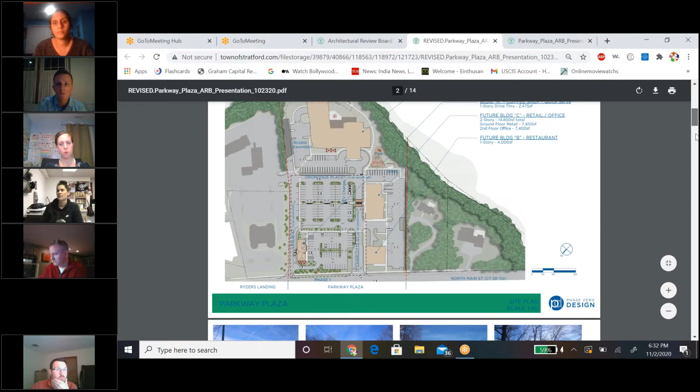They're going to be eventually developed into this CNC district, which we've created as 4 different buildings with allowable uses in the CNC zone. But tonight we're only here for the coffee shop, which is building A in the left-hand corner along Main Street, basically on 6540 Main Street. It's the only building being developed at this stage of the project. Buildings B, C, and D are for future development. They will be CNC uses, but because they're for different stages or phases of the development, they're not going to be discussed and are not under consideration here tonight.

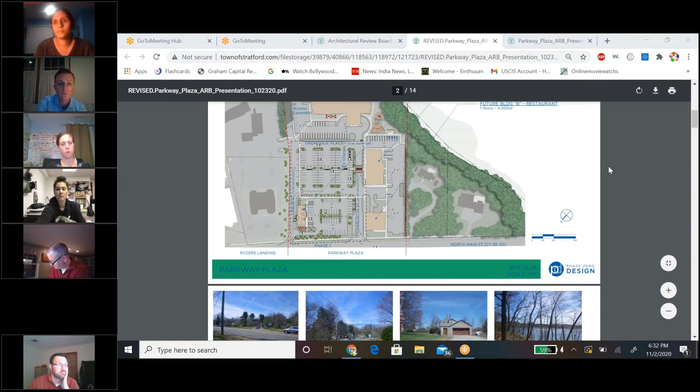So we've submitted everything for you guys to consider for building A, the coffee shop. It's going to be a 2,475 square foot drive-through sit-down establishment. Again, it's an allowable use in the CNC zone. It's going to fit all the CNC requirements and meet all the special case criteria. We'll present all that when we go to zoning for our special case and site plan application process.

The building dimensions are approximately 80 foot long by 28 foot wide. It's going to be 1 story, approximately 25.5 feet tall. In designing this building, we've considered the historical New England village character of Stratford. It's going to be compatible with the surroundings and this overall development. We've shown and factored in appropriate open space. Entrances, exits and parking are going to be safe and accessible, and there's also going to be pedestrian access and bike paths.

I'd like to bring in Robin Kiernan, our project architect with the firm Phase Zero Design. She's going to speak about the architectural style and character of the coffee shop, the building materials and colors, the roof and facade, the lighting, and some of the other features at this time.

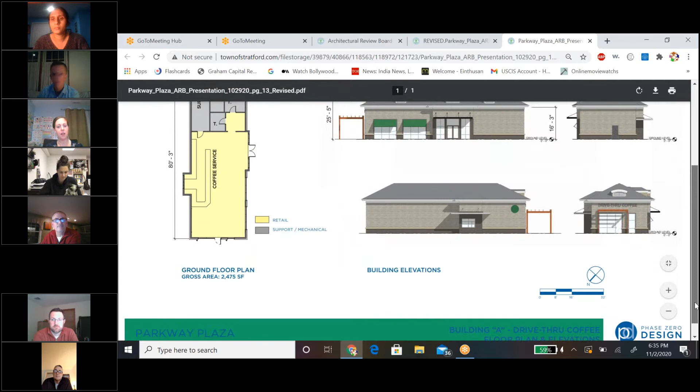Thank you. So I'm Robin Kernan with Phase Zero Design. Before we dive into the drawings of this specific building, some considerations we took for the overall design, as we're only presenting phase one at this point, but we do have a comprehensive design for the entire development. Our original inspiration per Dr. Spriglio's request was that the design be based off of or derived from inspiration from the Merritt Parkway due to the direct vicinity, but also the architectural history and value.

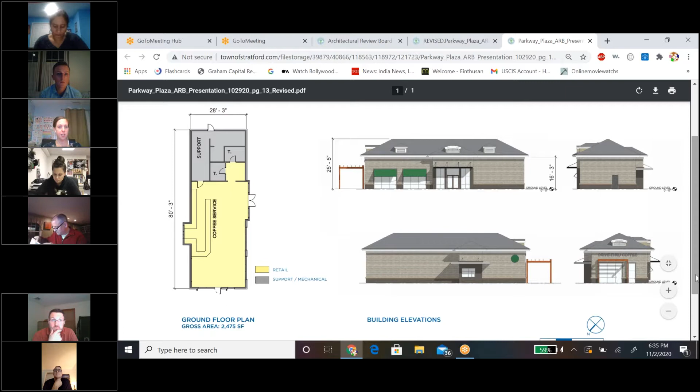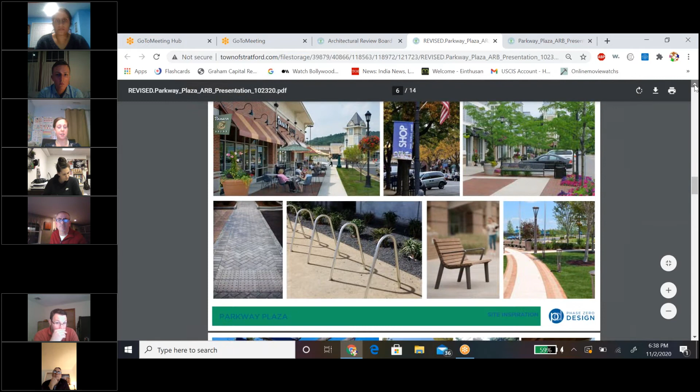You go down one more slide. Yes. This one? Whoops, I think it's one more up. Sorry, I know they're sliding fast. Yes, this one.

So as much as we're emphasizing building materials, we also wanted to have strong emphasis on softscape and hardscape. These were again some precedent images that we looked at with different colors of hardscape, herringbone pattern inlays. And a lot of these materials will be shown when we get into the site-specific design as part of planning and zoning, but things we wanted to take into consideration for the initial design of the building.

We have started to select some of our site elements, which you'll see in a few slides, specifically looking at aluminum benches, trash receptacles, and light fixtures that again are blending that modern and traditional looks.

You go down one more slide.

Something else and some feedback that we had gotten from our preliminary meeting many, many months ago was that we really wanted to incorporate placemaking into the overall design.

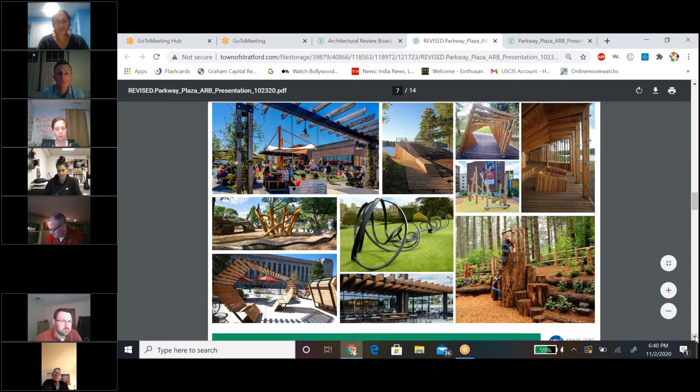Slide down another slide. Okay, I think I went too fast. Yep, that's okay. Halfway there. There you go.

Can go down to the next slide, please.

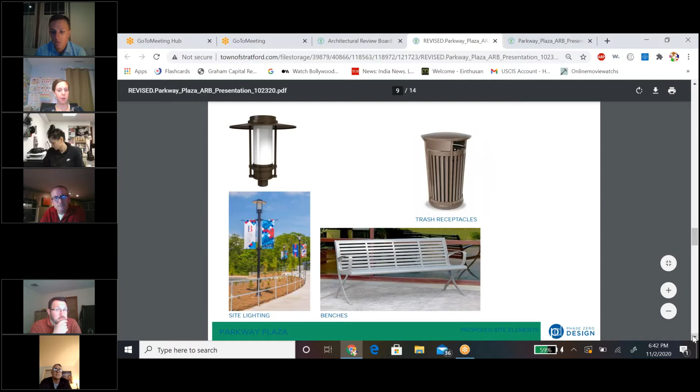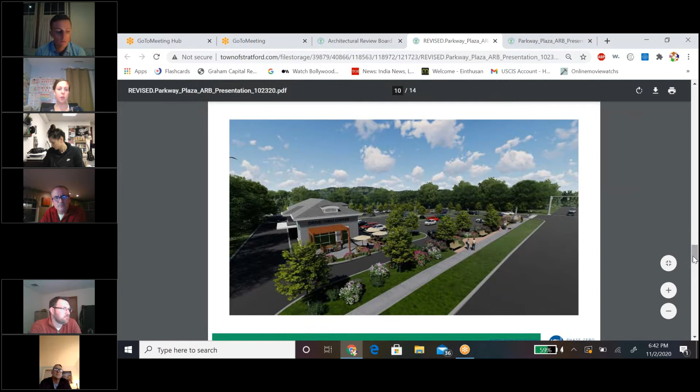We've included some perspectives representing the building, but also the site, of equal importance. You'll see the pedestrian walkway running parallel to Main Street, and you'll see from another view in a few moments where the sidewalk then turns up and runs perpendicular to Main Street for pedestrian access that loops around to the coffee shop. You can start to see that outdoor seating area with the wood-like pergola structure out front of the building. And we've taken into great consideration for site elements, landscaping to create a buffer from Main Street into particularly the parking fields.

Go to the next slide, please.

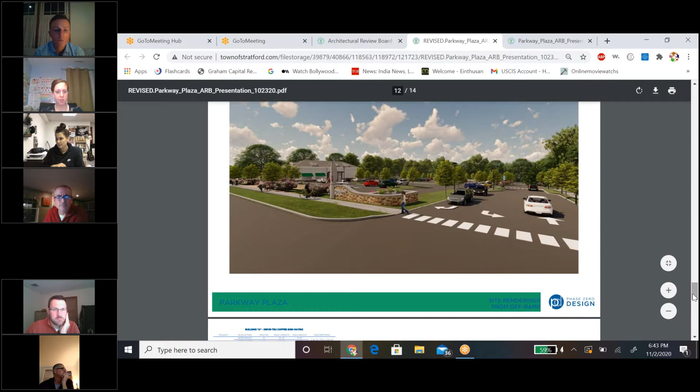This 3D image is from that main entry point, so you can start to see some of the stacked stone elements there for some wayfinding and signage into the development. And then what you don't see on the far right side, you'll have a similar arc of the stacked stone to really highlight that entry point. And you can start to see the sidewalk on the far right side that will help with the pedestrian access.

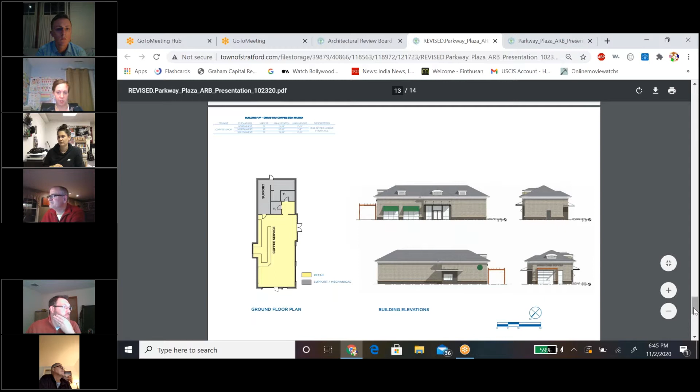And if you go to the last slide, you should see a closer perspective of the building. Thank you. So this is kind of everything I've talked about. You have the black iron metal canopy highlighting the entry point with your awnings to the left of that. We will have some landscaping there before the building footprint itself. Outdoor seating on the far left, which is facing Main Street. The trash collection will be concealed by the building from the street, on the far right side, kind of tucked around the corner.

And that's pretty much where we are.

Shall I turn off the screen share? Is it helpful to leave it on if people have questions, if we want to return to a specific slide? Yeah, I think that's fine.

So Jamie Miller, Chairman, thank you Robin for that presentation. I think what we'd like to do, and I'll point out, I see John Zabel who's here now. I'd like to point out he's recused himself because of prior relationships, but I think it's the civil engineer surveying company, so he will not be participating in this. But I think the best way to do this digitally is to go around the room one by one and ask for board members' comments. I'm just going to go in order here, and I see Steve first.

So Steve, would you like to weigh in on your thoughts? Yeah, Vice Chairman Steve Law here. Thank you, Robin, for putting this presentation together. I have a few comments, not in any specific order. I'll just run through them individually.

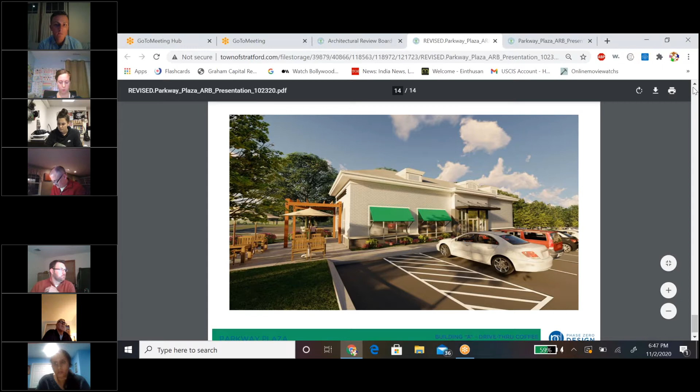The west elevation of the coffee shop is fairly unarticulated, and it's unfortunate since we're trying to create more of a streetscape. I know it's not on Main Street, but if there's any way to articulate that elevation a little more, I think that would help the overall aesthetic of the building. What our guidelines try to do is create more of a sense of place and a streetscape, so that's why I'm wondering if there's a way to put the drive-through on the north end, the short end of the building, towards the inner part of the complex and not on the edges.

A couple other items. I don't see any connection for the bike path—there's a greenway bike path that goes up and across the bridge. Will there be a connection to that bike path?

Just a couple other comments. Yeah, do you want me to respond, or do you want to wait until the end?

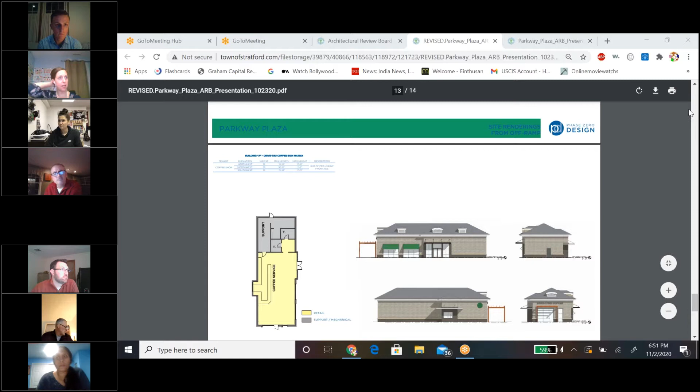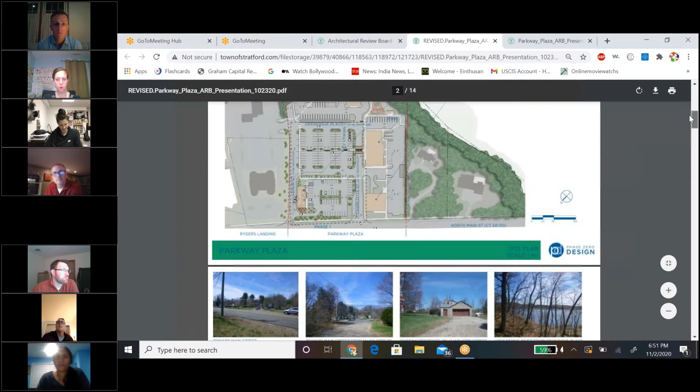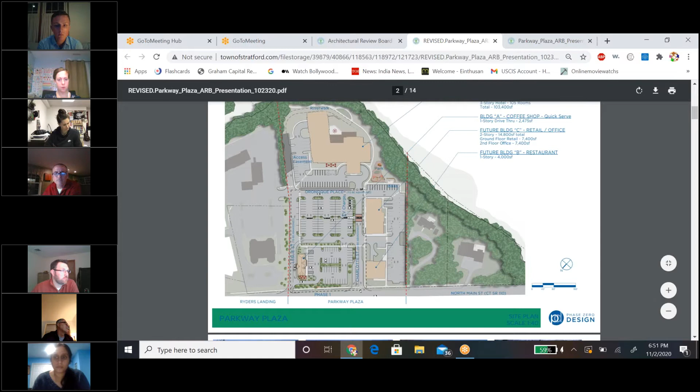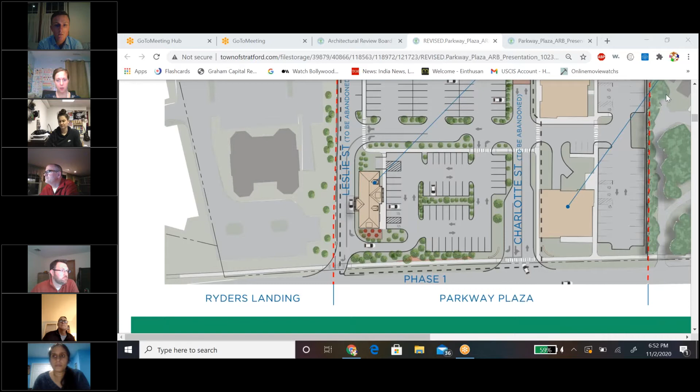Yes, thank you. If you could zoom in just a little, specifically there is a red dashed outline around phase 1. It might help if we can look a little closer. Yeah, trying to do that. So where did you want me to do it? If you just scroll up just a little, we don't necessarily need to see the entire parking field in the middle, but. Is this good? Perfect, thank you.

Yeah, that works. So I agree with your comments, Steve, regarding the elevation on the far left side, which is in this case planned west. I agree we can add some decorative elements there, some more design elements. That is the drive-through side. I can discuss potential relocation with the civil engineers, but we did explore a lot of options. This was the best location in order to allow for queuing, to not back up. We have, I believe, an 11 car queue for this drive-through, which is the tenant's requirement.

One of their other requirements, and I think it works well, is we wanted to have a bypass lane, which is this exit off of Leslie. It is a one-way street from basically the middle of the site, just north of the coffee area with their parking. So it is a one-way exit, so you either can queue into the drive-through for the coffee and then route back through and then exit out through Charlotte, or you can opt to do the bypass lane on the far left, being this is a one-way, and it's a little hard to see here just because we're not scrolled down all the way, but it is a right turn only out of Leslie. So all of that played into the placement of the drive-through, the orientation of the building.

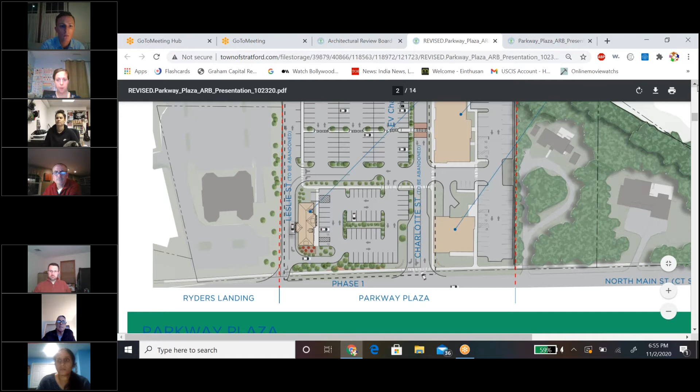As part of a later phase, the pedestrian walkway that runs parallel to Charlotte Street will then connect up to where we have a designated bike rack area with an outdoor community placemaking park, for lack of a better term. So we will have that as part of the overall concept.

Phase 1 doesn't specifically identify bike storage, but it does provide pedestrian access.

Regarding the parking count, yes, for phase 1 it does feel like a lot of parking, because that center parking field is actually going to support all of the later buildings. We included this in phase 1 not because we need it for parking, but due to site drainage and grading that will need to occur to first develop phase 1. We'll go into much further detail for planning and zoning when we submit the grading and drainage drawings, but we needed to develop that parking field in order to create phase 1 for the coffee shop and its adjacent parking. It just happens to fall into it, even though it does feel like a lot of parking initially.

To be honest, we hadn't discussed a bus shelter along Main Street. I think we would be very open to discussing that. I don't think we're opposed to it. I might relay that to Steve Warner to see if he has any comments on it, but that's definitely something we can take into consideration.

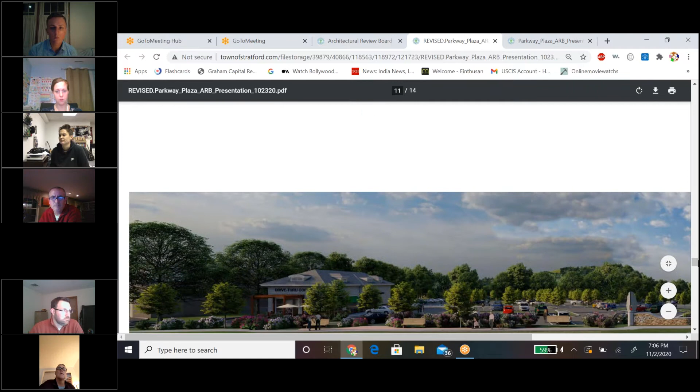Perfect, thank you. So what we are proposing, as we're finalizing the site design plans, we will be updating our perspectives to correspond to specific tree types. Right now these are a bit of placeholders as we finalize the site design. We do propose 4 maple trees running along Main Street as part of phase 1. We'll be conscientious not to block the building signage, as that's crucial for the tenant and the users. We plan to incorporate native shrubs such as hydrangeas with ground cover of white coneflower, juniper, and black-eyed Susan - so some varying height, but only 4 trees.

This perspective will be updated to represent those exact locations. We are going to have this curved detail that juts out past the sidewalk, this undulation, just to enhance the user experience as opposed to just a straight sidewalk, and an opportunity to put some benches there.

So the trees in the front are going to be red maples, but we also, through the rest of the site, will be incorporating, in the parking inlay, honey locust, and then along Charlotte Street, which is perpendicular to Main, black gum trees, and then the main parking field beyond is going to be swamp white oak.

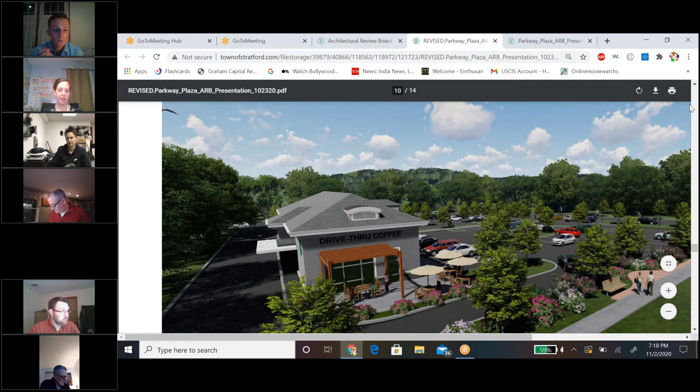Robin Kernan, Phase Zero Design. Yes, on the site plan, page 2, we incorporate a limit of work for Phase 1, shown as a black dash line. It will be the coffee shop with drive-through, the parking directly to the right of that, and the parking field to the plan north of that. Essentially anywhere populated with landscaping and actual trees is that middle rectangle - parking directly adjacent to the coffee shop, and also the parking field directly north of that.

Jamie Millward, Chair. Okay, I see it now, it's not on the package we have, but now I'm seeing the line. So you're going all the way up to what used to be called Oronoque Place, and all that parking is happening at this time. Correct.

Okay, so I understand better. I thought at first it was just the area down in front by the building. So until the rest of this site gets developed, you're going to have huge amounts of parking there, and this little building. Is it a requirement? I mean, is there no other way around it? I understand you had some engineering input on getting drainage to work, but you're saying that entire area, up above towards Oronoque Place, all of that has to be constructed at this time. There's no other way around that, because we're really going to be looking at a sea of parking lot, probably not even utilized for however many years it might be until the rest of that site gets developed.

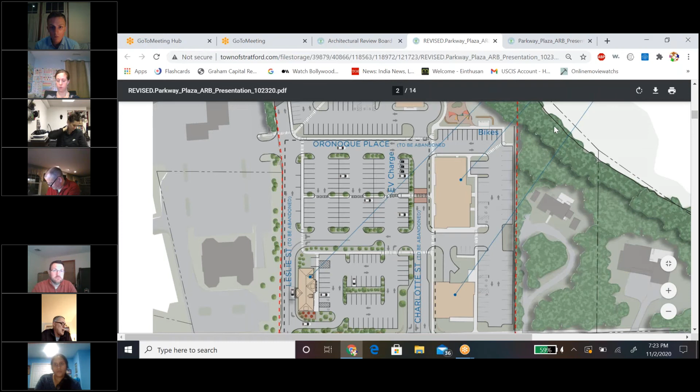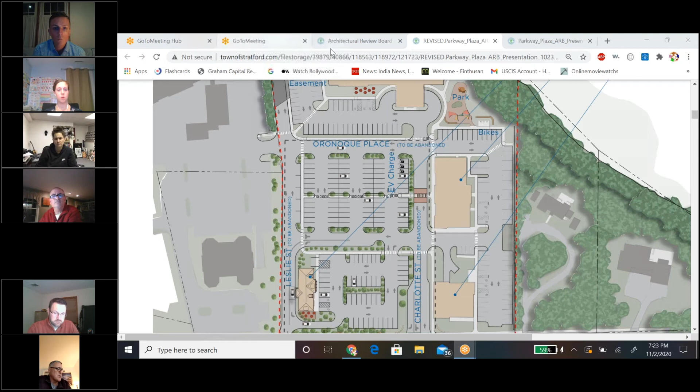Go ahead, one other comment for Robin and the team. I believe there's a grade difference there - the building to the left of the coffee shop is a medical building, and that's at the Main Street level, but Ryders Landing Plaza in the back is quite a bit lower, if I'm correct. Is there some grade transition at Oronoque Place, when are those two plazas going to communicate with one another? Yes, they will. And is there some grading that has to happen to make that work?

Yes, Steve, there will be grading to make that work, correct. Okay, thank you. You're welcome.